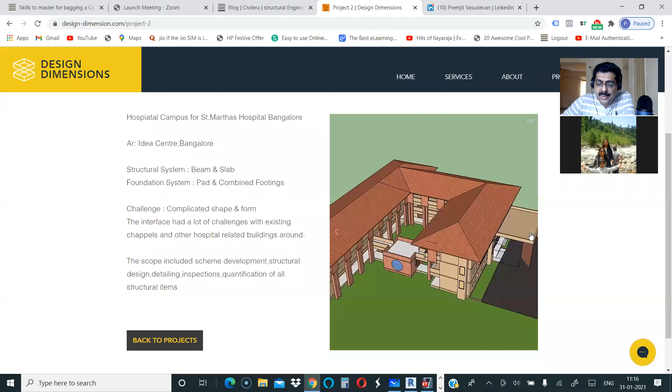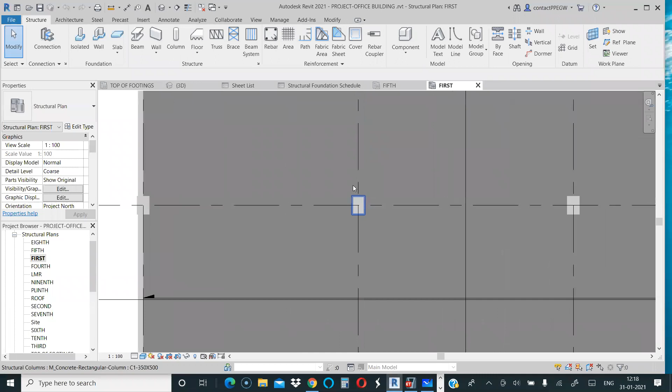Yeah. So the advantage is that, say, for example, you have a wall here, and that's the reason I have put the column here. And if the architect moves the wall, you will be able to understand that because it's all coordinated. It's all interlinked. That way it enables you to do things.

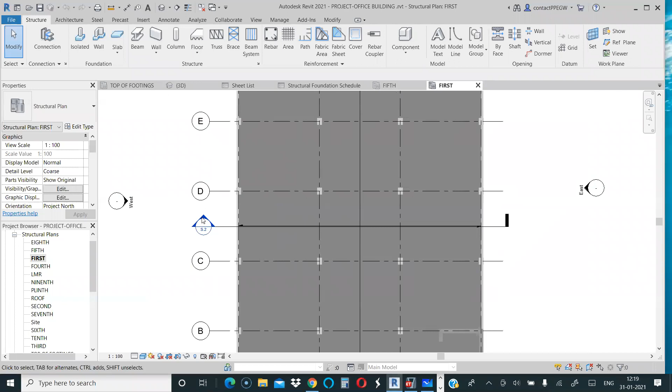And another advantage is that you can very quickly get sections and all that. So if I click on this particular thing, you get the section. So you don't need to spend your time drawing your sections, and it will remain coordinated. For example, if you change the beam depth here, automatically the depth will get reflected in the section also.

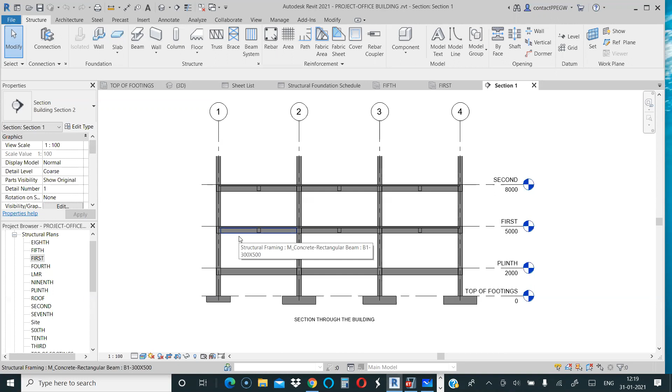But in a conventional way, when you work, there are chances that you forget to change the size of the beam in plan, or you change the size in plan but you didn't change in section, so there will be discrepancies. So if you use Revit, this kind of discrepancies will never happen. You will be able to have well coordinated error-free drawings. There is much to it, but I will not be able to tell you everything in a short span of time, so be with me. All I can tell you now is it helps in coordinating.

Can you please mute whoever is speaking, please?

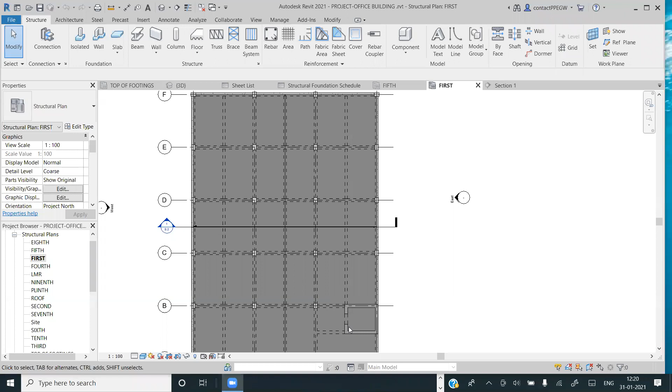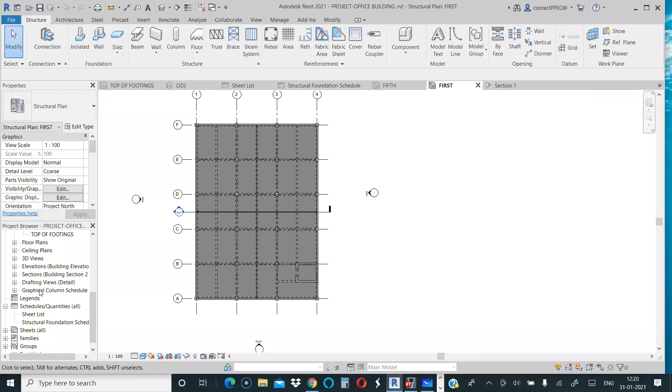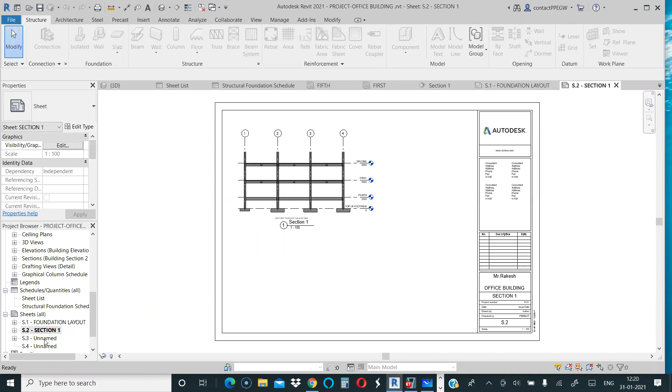So that is one advantage, coordination, and then producing your drawings in a super fast way. All your GA drawings, your general arrangement, your plans will be super fast. So you can present it in the same way as you see in your AutoCAD drawings. If you look at your sheets, you will get as good as in AutoCAD. So it looks like a drawing, but actually it's a model. It's a 3D model converted into drawing. So sections, everything you get in a very error-free manner.

So that's the advantage. Coordination happens, error-free drawings do happen, and you will be able to get the quantities as well. And even rebar detailing is possible to a certain extent, that we will cover in a different webinar.

So as such, I wanted to speak only this. So if you have any kind of questions, you can ask me. I wanted to cover a few more things, but then we are short of time.

Basically, it's the gaps that you need to cover. You need to have a complete understanding of your building project for becoming independent. So if you do that, then the chances of landing a job, the chances of performing well in a job is much higher.

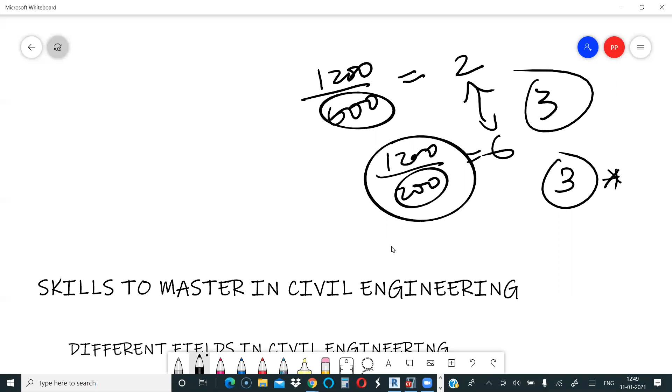But you cannot compromise on that because that's what the code tells you. You need to have that kind of margin for factor of safety for soil capacity. So when you are doing that, further increasing your load by 1.5 times is going to be a little too much. So the code allows you to use unfactored load for sizing of the footing, only for sizing. After that, you find the pressure, and you have to factor again to get the moments and your shear.

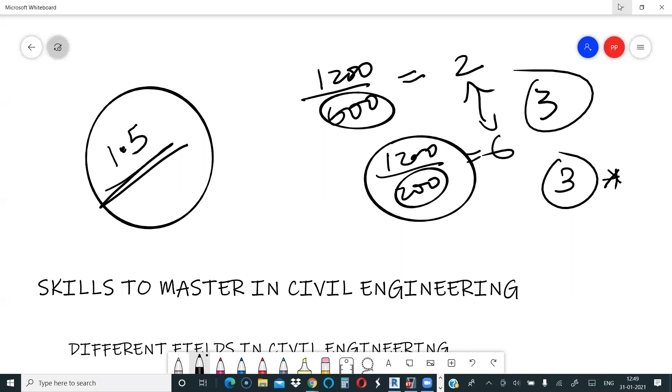So like this, a lot of points you are going to get from this quiz, so you understand where you stand.